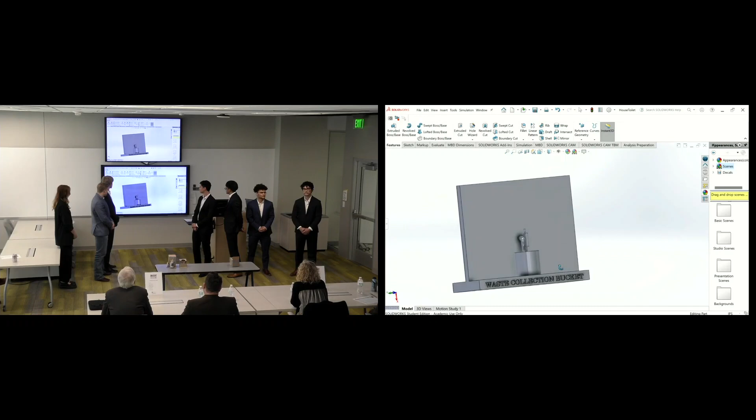Introducing Resoil, a sustainable solution to India's toilet crisis, providing sewageless toilets to every household, enhancing well-being, feeding the hungry, cleaning the streets, and empowering 1.4 billion Indians to make a change in their communities.

For themselves, for their neighbors, for their children, the future of India. This is a dignifying solution to a dehumanizing problem. This is the future for a healthier tomorrow. This is Resoil.

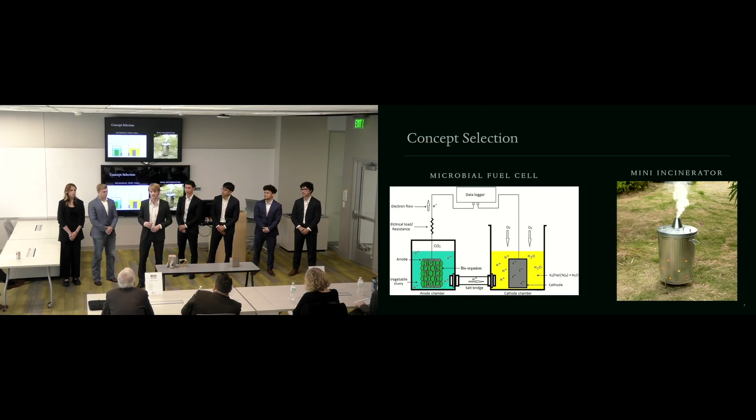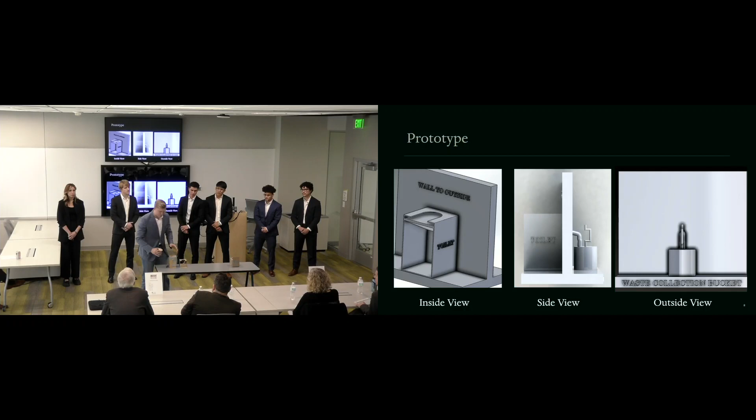This is a business model that combines both a service and a product. This right here is our product and the process we'll be going through. We are providing a system of toiletry access in each household, and coming with that, we are selling this tank right here. This is going to be a 5 to 10 gallon tank that meets the needs of the person, and it comes with a cap that includes a mixer.

Each tank, when replaced, will come with a compound that we make that breaks down the human feces and mixes it together, producing a fertilizer. The process is simple: it is taken out of the house with no contact with the feces itself. It is plugged, then transported to another facility where it will marinate and sit for 140 days while the chemical process takes place. Then it will be placed outside to dry and be turned into fertilizer, bagged and sold to communities. This has been tried in Haiti, but the process wasn't really socially accepted there.

It did work pretty well, but I feel we have improved this process greatly, and it definitely applies to the people of India. And now for more on the fertilization process.

Human waste has valuable nutrients, and by composting it we are able to turn those nutrients into a usable fertilizer. However, to make this fertilizer more saturated with nutrients, we are adding a biosubstrate made from readily available materials like food scraps and grass clippings, and we're going to include that in our buckets.

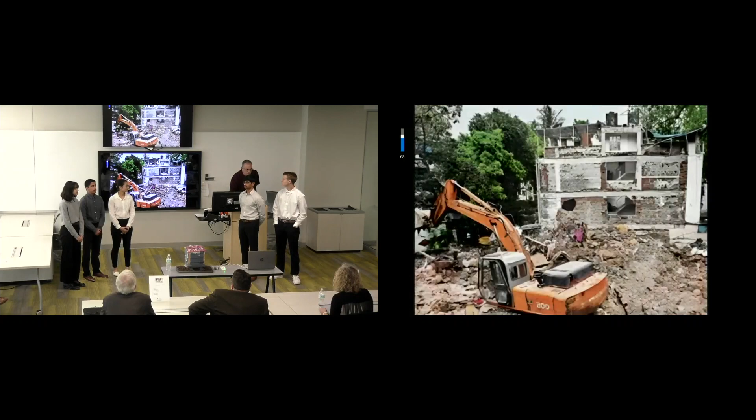This is Alka Palanda and her son Naresh. On June 25th, 2023, their home in Mumbai, India, collapsed from a monsoon. After an overnight rescue operation, it was revealed that both them and their dog were killed. This situation is not uncommon in Indian slum communities. Now, dozens of people have died in flooding as torrential rains sweep across India. There are so many poorly maintained structures and makeshift settlements, too risky to be inhabited, but people continue to live there.

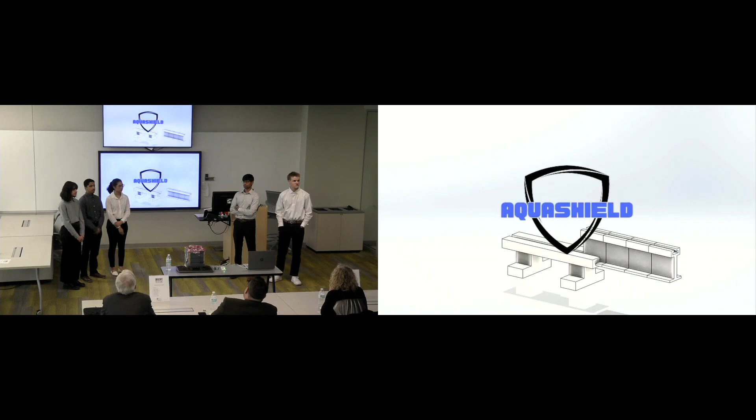So what can we do? Introducing our product AquaShield, revolutionizing housing conditions for slum communities so we can save people like Alka and Naresh and make their houses finally feel like homes.

What we wanted to do with our product is support these homes and ensure that they have the strength to withstand 5 centimeters of rainfall per day for up to at least 10 days. We want to make sure there is efficient installation, so the product should be able to be installed in under 24 hours. Taking into consideration our target customers, we want to make sure it is affordable, so less than $800 for selling.

In terms of ease of operation, considering that these communities are tightly packed and we can't have high construction in this space, it should be installable and operable by up to 5 people maximum. And in terms of the environment of these communities, we want to make sure our product is sustainable, so we should incorporate recycling and reusing waste when manufacturing our product.

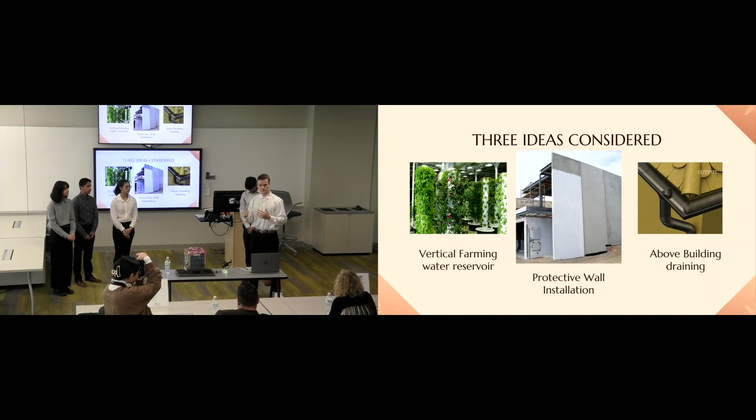What if we could do all 3? Introducing AquaShield. AquaShield is a revolutionary method to revitalize these Indian communities. It is a modular housing solution that uses interlocking panels of recyclable plastic waste, forming a structure that also supports these Indian slums.

The heavy rainwater that accumulates on the roof is channeled down onto the sink at the top, where the water is channeled down into two different routes. It could either flow through the gutter system straight to the local drainage, or it could be channeled down through 3 vertical farms. After being filtered through the 3 vertical farms, the water flows into the storage container.

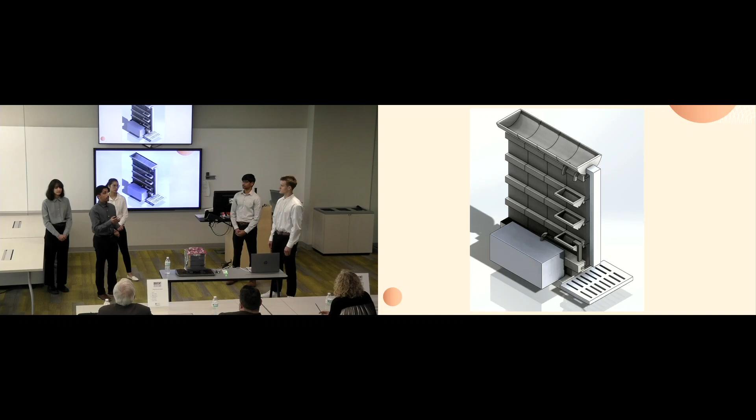There is a sensor in the container that tells the family about the contamination levels in the water. This entire structure is supported at the base through a concrete foundation to provide structural support, and this solution redirects the heavy rain that could have accumulated at the bottom and caused erosion into a sustainable method. Let me give a little product demonstration on how this works with the vertical farm situation.

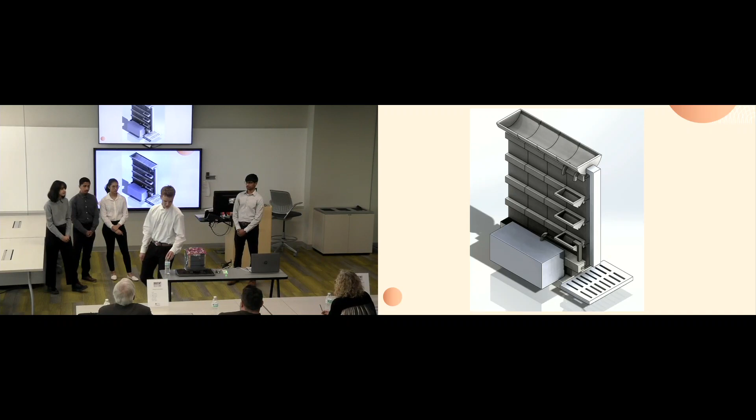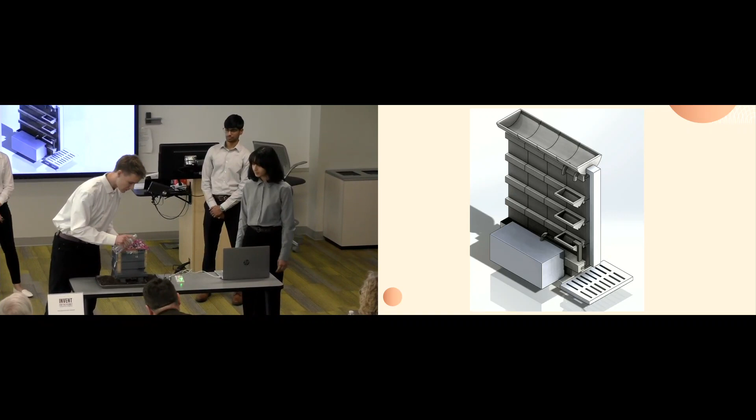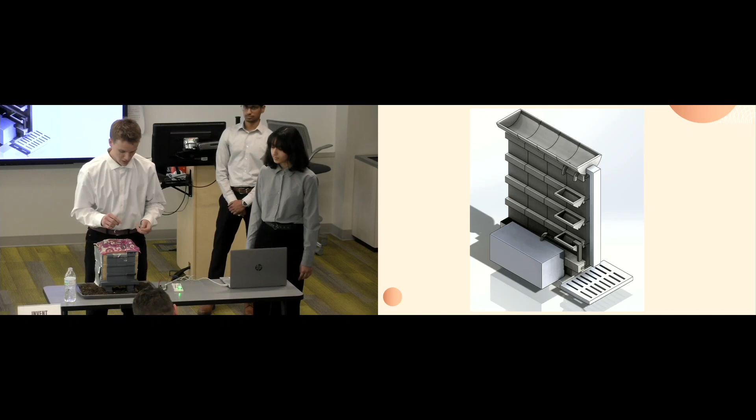So when rain comes down and hits the roof of the wall, it's going to slide off, and right here, when it enters our chamber, there would be walls that contain it and send it through a gutter going to local water storage. There are 2 holes right here, I know y'all can't see them, but they drop down to the vertical farm storage.

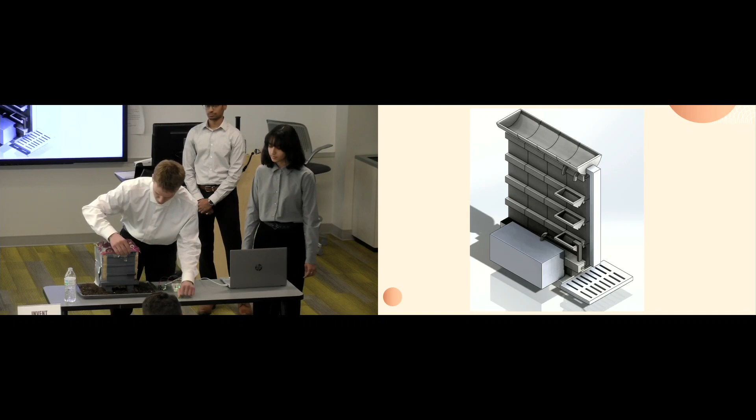It goes through multiple vertical farm sections, filters out the water with soil and charcoal, and then it lands in a storage container that the family would have.

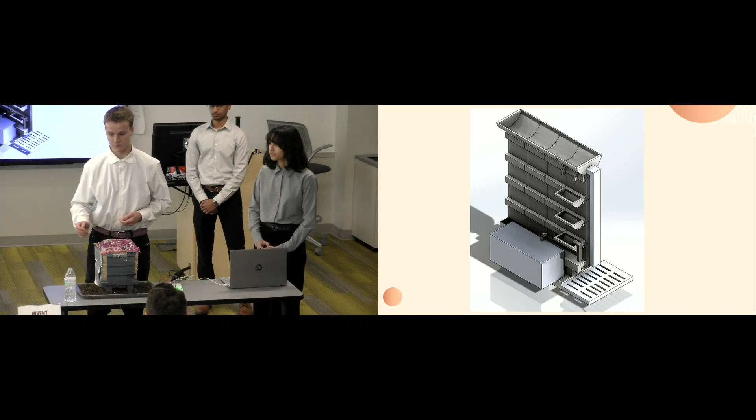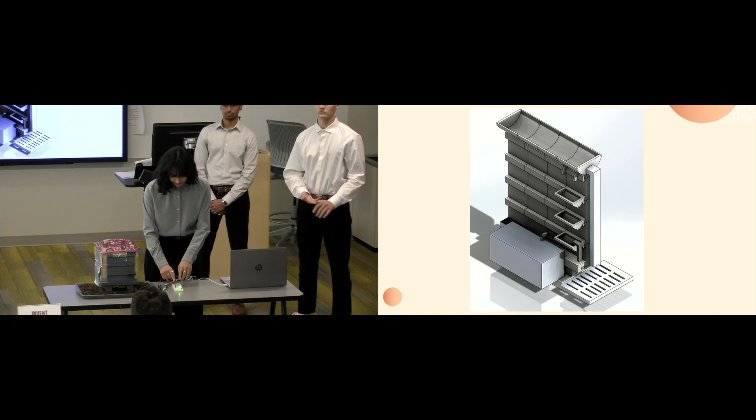So when it comes to that storage container, especially through the vertical farming, we want to notify the residents in case the water is contaminated. There would be a sensor, and if that sensor gets covered, this light turns red, and that would notify the family to ensure health and safety.

Our sustainable solution utilizes high-density polyethylene materials, and also uses reinforced concrete, PVC pipes, and basic electronic components. As you can see, our design was designed with cost in mind and provides very cheap solutions for our customers.

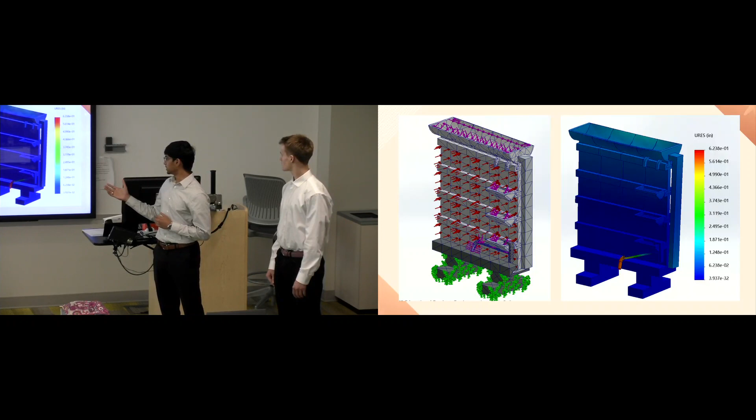And we performed many FEA simulations with high wind loading and water pressure. From this, we can see that the maximum stress and displacement of our structure is within acceptable limits.

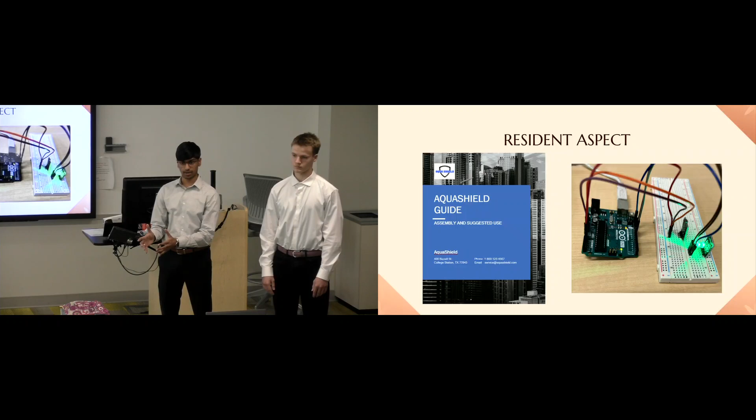And so we are customer oriented here at AquaShield. We provide documentation with assembly instructions, suggested use, and also keep in mind the sensor outputs. We would have that pH sensor or any type of water contamination sensor, which would flash in a simple, easy red or green manner to show if it's good to use or not, and how it had been treated accordingly.

So the future of this - right now it just looks like a wall. What we want to eventually do with it is, because of our interlocking panels and simplistic design, add all 4 walls as well as a roof. So it would be a completely new home renovating system, one wall at a time. We'd like to add a variety of panels, so you'd have a door panel, a window panel, to make it truly a home.

Imagine half of this room was living in unsanitary and unsafe living conditions. Join AquaShield and allow us to help these communities just as you would help the person sitting next to you. Thank you.

Judges, what questions do you have for AquaShield?

So you have the $800 target. How does that compare to what they would normally be spending? It sounded like a lot of it was salvaged materials, so how does that compare? And is that for one wall, or for the full home, and how does that compare to their current housing cost?

We started with that $800 budget to keep it simple, and with a 4 foot by 8 foot wall, that would come out to a total of $541. Currently there was one grant sent out by the Indian government to give $1,200 of restoration per home for slum communities. Considering this is $541, that falls into what was previously proven from grants, so that's why we think this would be a good solution.

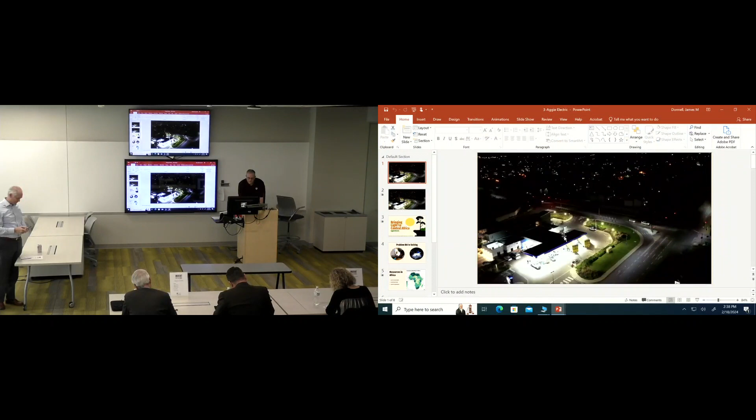Now it's time for your local utility, Aggie Electric. City. Judges, just a minute. It's going to be a cold, dark night. Whoa. I just said wait until the judges get.

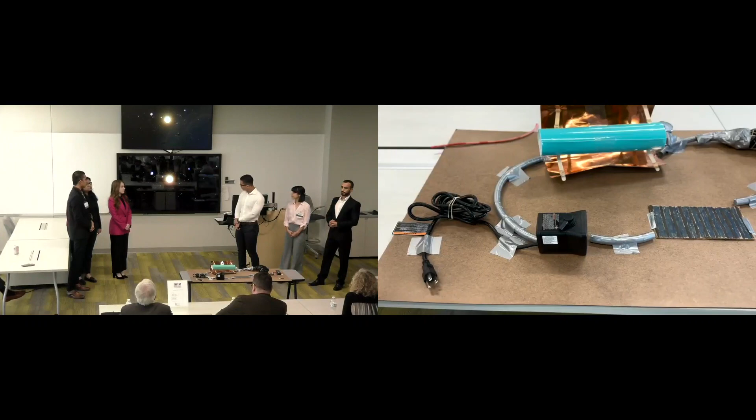Meet SunSteam, a leap into the future. It's simple: we use mirrors to concentrate sunlight, boiling water to create steam. This steam then spins magnets around a coil, converting sunlight into electricity. And the best part? We collect this steam, turn it back into water, and start all over again. Endless energy from an endless cycle. With SunSteam, the end of daylight no longer means the end of opportunities. Education, safety, warmth, now within reach for every home, every heart, powered by the sun long into the night. With SunSteam, we harness the power of the sun to bring light and energy where darkness has lingered for too long. It's not just about providing electricity, it's about igniting hope, empowering dreams, and enabling progress in every home and heart we touch.

This is just the beginning. With SunSteam, we're not just imagining a brighter tomorrow, we're making it. Join us and let's bring light to every corner of the world.

Hundreds of millions of people in Africa need reliable and affordable electricity to light their homes, power education, and fuel development. Picture this.

Picture this: when the sun goes down in Africa, many homes stay dark. Why is this? It's because they don't have electricity. They need electricity to power their homes for any electrical process that they need. Imagine this: you can't charge your phone, you can't keep your food in your refrigerator, you wouldn't be able to turn on your bathroom light at night. 600 million people have to go through this in Africa.

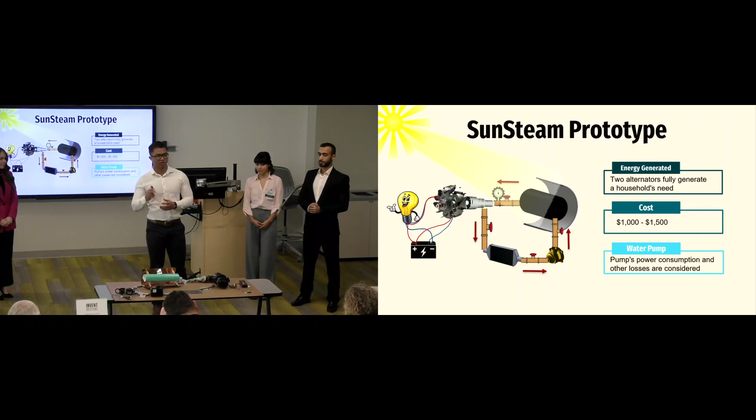Our solution is all about using what you have, right? The sun. So join us - it's all about using the sun, right? So join us to make a better life for everyone. Thank you.

I'd like to push back a little bit on the perceived complexity of this versus solar. Could you dive in a little bit deeper into why this is a less expensive solution compared to just a solar panel and a battery?

Usually in Africa, there are two different types of programs used for solar panels. Either a very small kit, $30 or so, with one lamp, which is effective for one light in one room but doesn't generate enough energy for the whole house. The other is government funding, where they put in solar panels and citizens pay as they go. But studies show that over time the costs really add up, and people end up consuming less energy than they are paying for.

This would help lower the cost. It would be an amount of money paid up front, but it would be good for years, so they pay these low costs now and have it over time. It wouldn't be an amount of energy that's absurd for them that they couldn't use.

So if I might add one more point, the answer is simple. We need 5,000 kilowatt hours per year for the household, so we did the math on how much energy one square meter of solar panel can generate. By calculating the area needed and the cost of those panels, the cost came out to be about $5,000 to $8,000. Using just a simple car alternator, maybe $80 or $100, with a pneumatic motor and a water pump, fabricating a simple tank and mirror, the cost was way less than a solar panel.

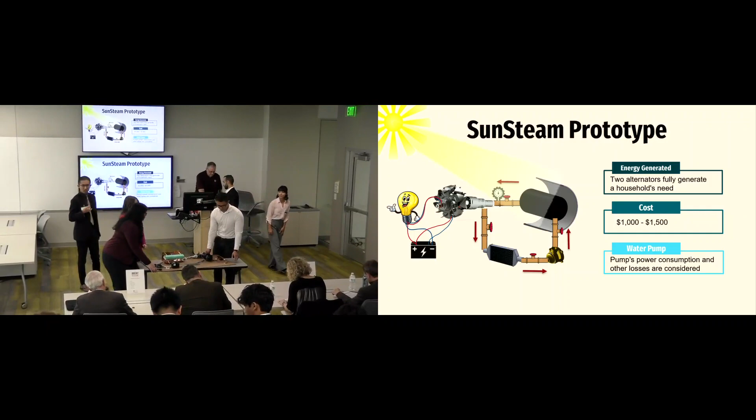Guys, so I'll tell you something. So you guys just get settled in. Let's let the judges wrap up their judging of the last team.

What is the native language of Papua New Guinea? Like anybody's gonna know, right?

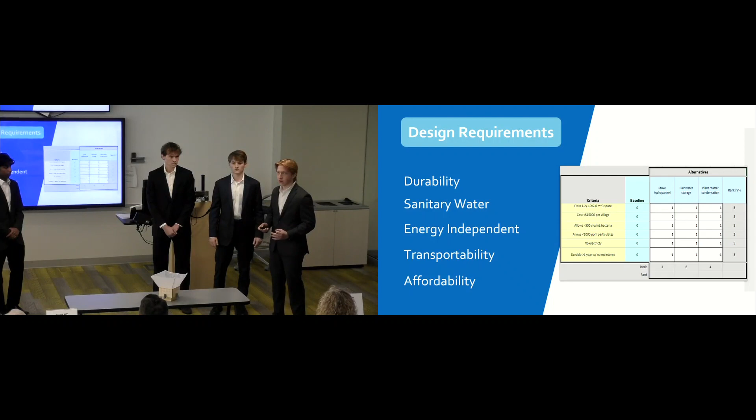These design requirements led us to three initial solutions that we brainstormed. Our first solution was a stove-powered hydro panel. At a high level, it takes in energy and heat from the stove and creates a high pressure area and a low pressure area on the other side.

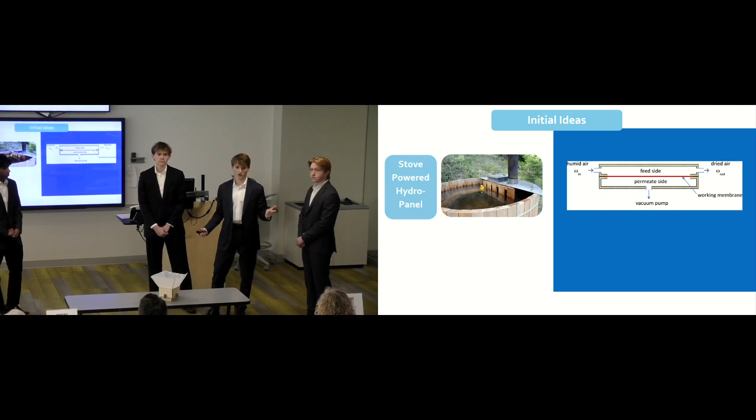It forces the humid air of Papua New Guinea through a semi-permeable membrane to draw the water out of the air. The problem with this is cost - that costs a lot. The second problem is health issues: if we don't manage the CO and CO2 coming out of the stove, we can cause health problems for the Papuans. The second idea was to plant a large-scale solar still.

Basically, we capture and collect water from plant matter. At a very high level, it's essentially a bag for a tree. This helps with costs, which are very low, but the two main problems are that it doesn't create enough water, and it requires a lot of maintenance.

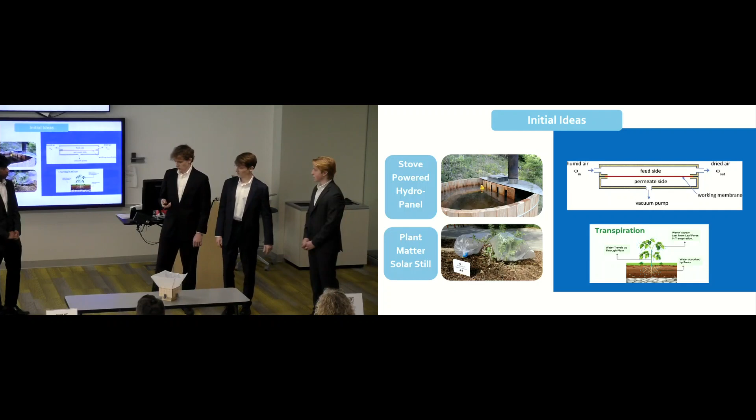Our third solution, which did meet all of our proposed design criteria, is an improved rainwater collection, storage, and filtration device. Our system is made out of modular panels that allow customization for whatever size storage is required for the village. It also includes a large canopy, increasing the aerial surface area, allowing it to gather rainwater for the dry season.

In between the canopy and panels, there's a fine mesh that serves two purposes: removing particulates from the storage container before it can enter, and reducing evaporation during the dry season. To access this water, it's moved through the filter, removing any bacteria before consumption. These filters can also remove particulates and bacteria from any other sources they may need supplemental water from.

Every component of our design is made out of a high durability polymer capable of lasting in the Papua New Guinea environment for many years. The lifespan of a filter is approximately 1 year, but this is heavily dependent on the size of the village. The entire component can be built using only basic hand tools and repaired with these same hand tools, which will be given to the community. This is critical, as our target demographic is deep in the interior of Papua New Guinea with little access to outside resources or assistance.

We also wanted to ensure that our filter was producing sanitary water, which we defined using two measurements: bacterial contamination level and dissolved particulate matter. If you look at our filter, you can see it has two stages, one for removing particulates and one for ensuring an antimicrobial water supply.

Our filter has two inlets: one for rainwater passing through from the large collection barrel you see here, and the other for small pots of water dumped in from a river. The dirty water from a river would go through both filters, whereas rainwater, which is essentially distilled, would only have to go through the antimicrobial filter. Also, our device is gravity fed due to the nature of these filters and can be used in remote locations, ensuring it's energy independent.

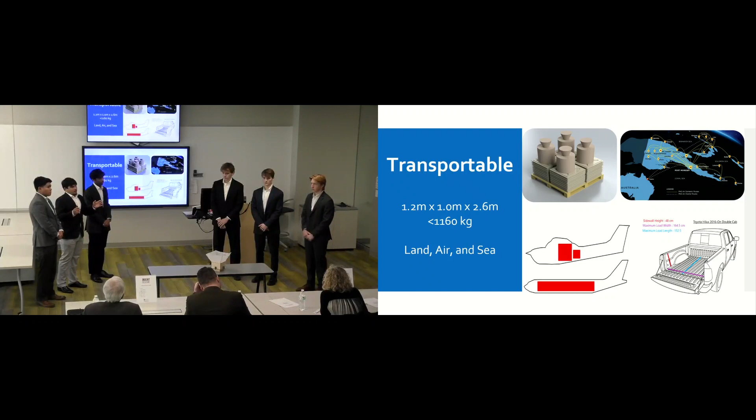We wanted to make it transportable, so we bring it from Australia to the inland, and then put it on pickup trucks and send it out to these rural villages, because Papua New Guinea has over 381 airports.

Next, we wanted to make it affordable. The next best option is wells, which cost over $15,000 per village, and we wanted to make it less than $15,000. We use local materials in our filters, such as zeolites and other nanoparticles.

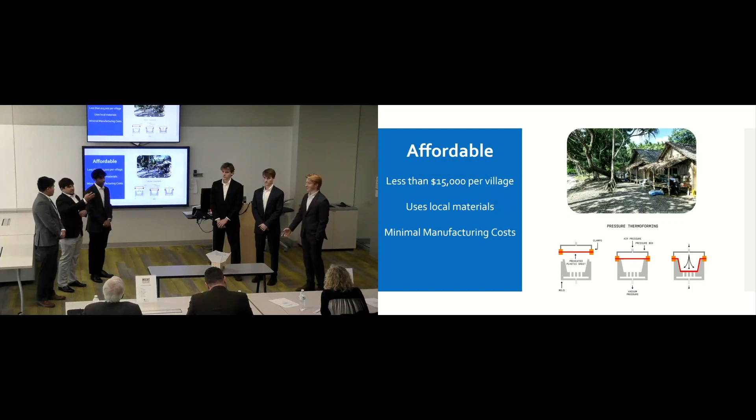We also have a minimum manufacturing cost system that is pressure thermoforming, in order to produce these at a mass scale. Thank you.

Questions for the project? How many gallons does this thing hold?

It's going to be heavily dependent on the village size. This is our standard configuration, where each panel is about half a meter tall, so this would be 7,000 liters. This is meant for a village of about 150 people. And how long will that sustain them?

This would be seen more as an emergency supply during the dry season. It would not last the entire dry season, but you could use the other intake on the filter to supplement this with other water. If you were unable to, due to an injury or an emergency, you would still have 7,000 liters to access.

So the problem is, they have access to water, they just don't have access to clean water, and they're making long walks. If you insert water into the funnel on top of each filter and pour it in, it's gravity fed. It also captures rainwater during the rainy season to help reduce how often people need to make the trip for water. So this is a water filtration and capture system.

Yes, and storage is also very important, as they have no real sustainable storage systems. This also allows you to use two different vessels for storage and gathering water, because if you stored water in the same vessel you gathered it in from a dirty creek, you'd still contaminate it with bacteria. So here, you have a gathering vessel, you run it through your filter, and with a separate, more sanitary storage vessel, you're drastically reducing the risk of bacterial infections.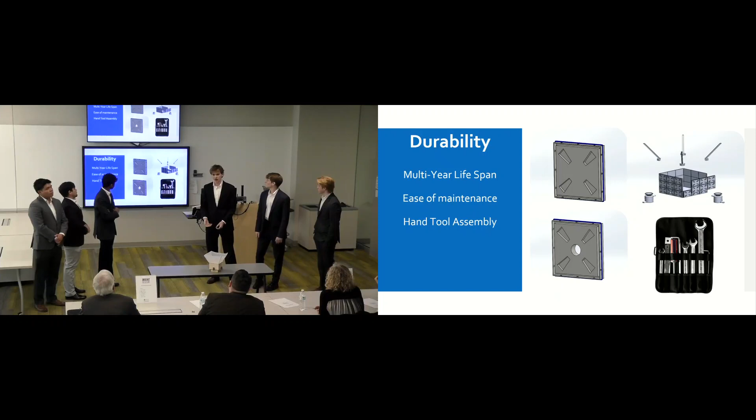It is going to be a little time-consuming to assemble this, but we're hoping this is a community effort involving the whole village, assembled using only basic hand tools that we would provide, bolts and locking washers. We also include a maintenance kit with spray foam and ways to mitigate leaks if that should occur, and instruction manuals to help ensure assembly is done correctly.

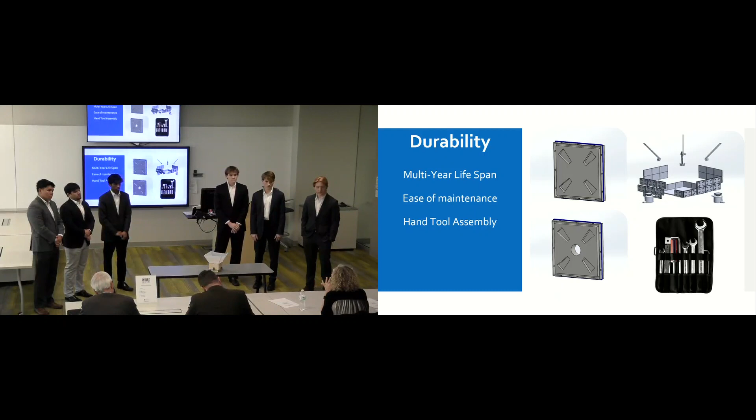The bacteria they're talking about is to be addressed with a filter that's only replaced once a year?

We'd love to talk about the unique design of our filter. There are two stages: the dirtiest water first goes through a particulate filter, designed with four layers. We wanted to ensure it wouldn't change the taste of the water, and that all the filter materials were biodegradable, because we don't want to bring excessive plastics and other materials to contaminate their environment.

Our filtration works by passing through coarse gravel, fine gravel, sand, and diatomaceous earth to ensure thorough removal of particulates. We believe our strongest innovation with regards to the filter happens in the antimicrobial layer, which is essentially a modified cellulose matrix impregnated with zeolites.

These zeolites have copper and zinc nanoparticles bonded to them. This ensures that bacteria and protozoa are killed as they pass through the membrane while still being a fully naturally derived material. Cellulose matrices essentially just mean modified cotton balls.

Cotton that is chemically treated and then having zeolites grown in situ in them and then having these nanoparticles bond to the surface. It appears just like a natural material that these people would feel comfortable with and be able to understand. Unlike chlorine and iodine-based disinfection tablets, it wouldn't impart an off or chemical taste to the water that would result in the population not wanting to adopt such a technology.

Based on how this is designed, we are removing most of the cloggable materials early in the filter. Because we're not using chemicals like chlorine that get used up generating reactive oxygen species in the bacterial destruction process, but rather using these nanoparticles that don't get used up but just stay in place and disrupt the cell walls, we can ensure our filter lasts for a very long time because those materials are not being consumed and it's not being clogged either.

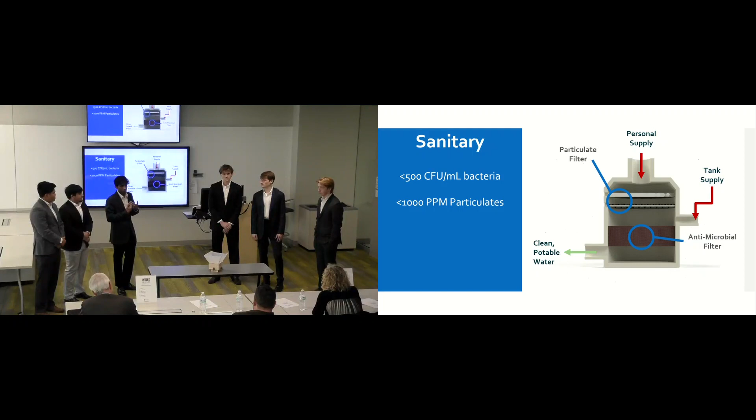Okay, that answer chewed up our time, so we are finished. Thank you.

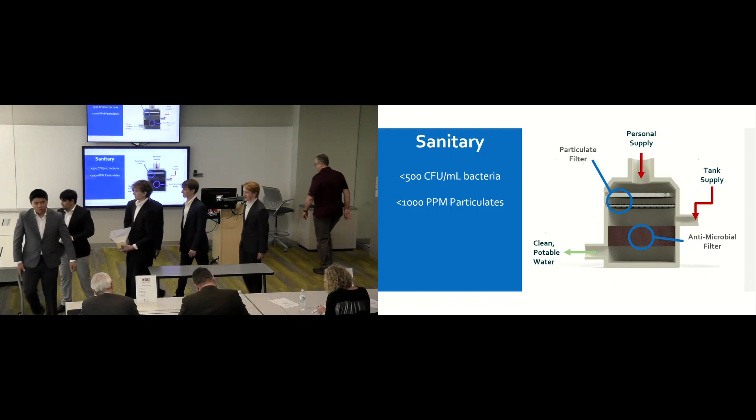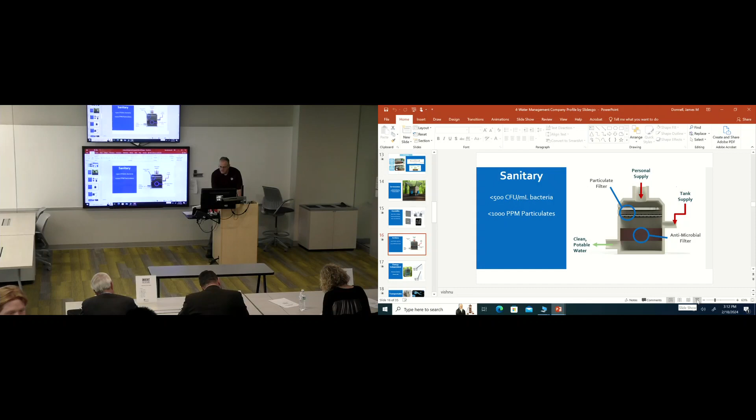Clicker, you guys take the clicker? Yeah, ready? You guys got the clicker. You took the clicker with you. It's a competitive advantage. Don't let the other teams have a clicker.

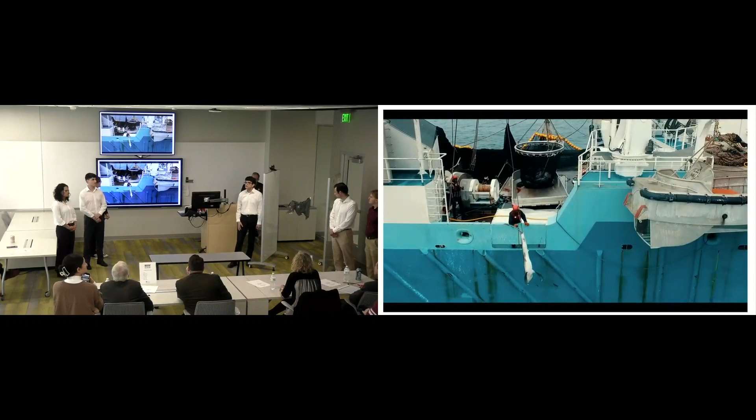The demand for food is growing at rates it has never done before. In order to keep up, fishermen are using unsustainable practices that claim the lives of millions of animals and destroy their habitat. The most damaging method is bottom trawling, used to catch shrimp. They drag giant nets across the bottom of the ocean floor, destroying any coral in their way.

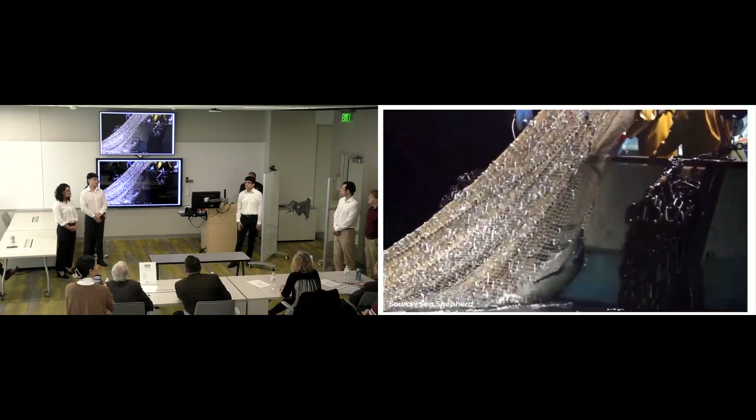Another problem is that it catches way more than just shrimp. Bycatch is the catching of unwanted animals during commercial fishing. Mammals like dolphins and turtles get trapped in nets and can't escape until it's too late. Fishermen often cut off the nets because they get stuck on the ocean floor.

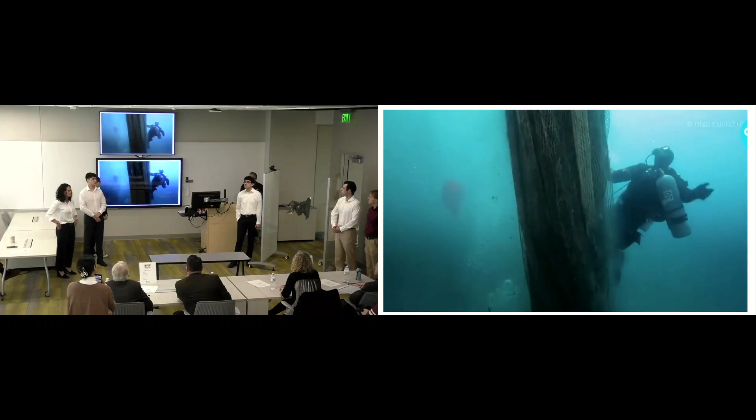Fish nets are the most lethal form of trash floating in the ocean. If the nets do break down to very small parts, fish consume it, introducing microplastics into your food. The environmental toll the fishing industry is taking on the ocean is unsustainable.

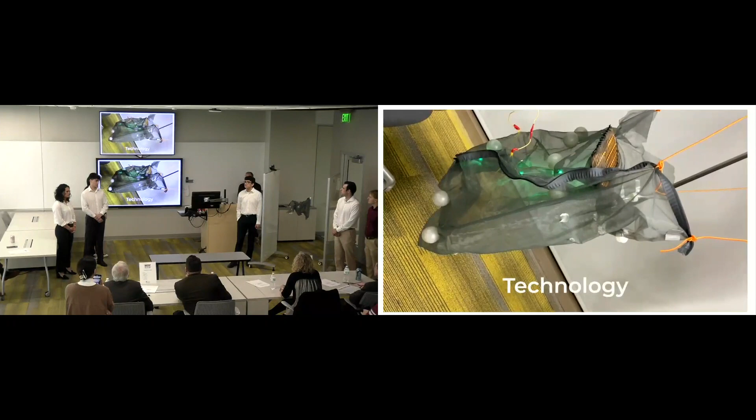But it doesn't have to be this way. Through adaptation of traditional bottom trawling nets and innovative technology, it is possible to maintain the current supply of seafood while minimizing the damage to the ocean. Replacing today's practices with sustainable ones ensures the fishing industry can keep thriving for centuries to come. Join us to forge a path to maintain the ocean's beauty.

We want to solve this problem by minimizing bycatch and minimizing marine destruction during shrimp bottom trawling in the Gulf of Mexico.

Because this is an environmental first product, any successful design needed to reduce bycatch by at least 50%. The shrimping industry in America has been around for over a century using the same methods. If we continue, there will not be a shrimping industry in the next 100 years.

We'd also like to reduce seabed contact by at least 50%. And because, of course, without commercial fishing partners, we wouldn't be able to change our practices, we are respectful of their time, of their 18-hour workdays.

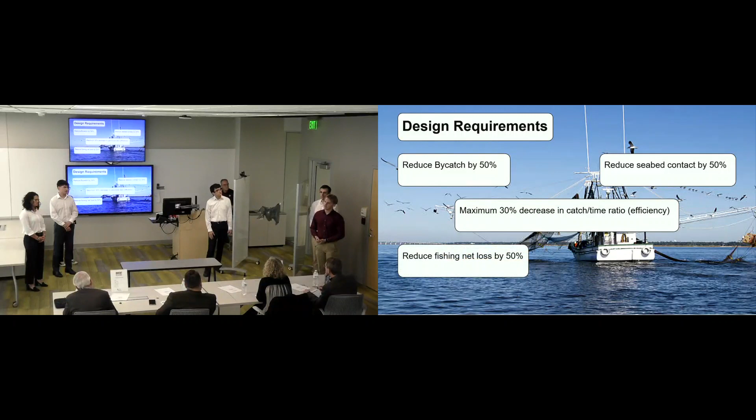We'd like to decrease their efficiency as little as possible. We'd like to reduce the damage and loss of their equipment by 50%, which also contributes to ghost nets.

And of course we understand many of these are medium, small, and family-owned businesses. We'd like to burden them as little as possible with costs. You may see 50% as a recurring number here. This was just a base estimate. We do hope to exceed these numbers significantly, but we wanted to have a solid commitment.

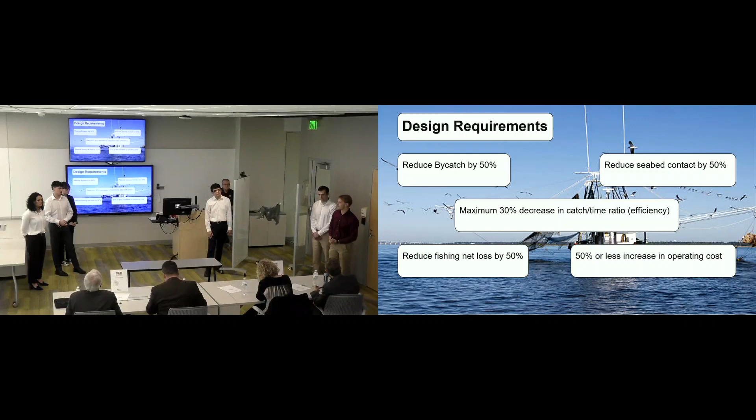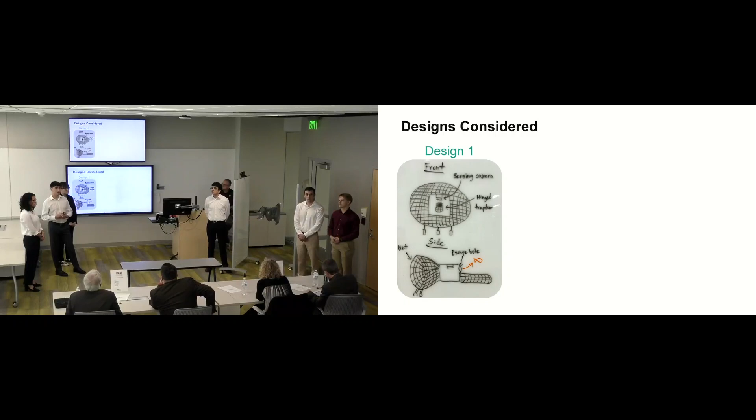So we came up with three net-based designs to address these design requirements. The first design features a sensing camera that detects species other than shrimp entering the net. When it detects a species other than shrimp, it allows it to escape through the escape hole. The second design features a filter screen that filters aquatic species larger than shrimp. However, if a baby fish the size of a shrimp slips through the filter, there are escape holes provided at the top so the fish can find its way out. The third design features a centrifuge that uses centrifugal force to sort the smaller fish from the larger fish.

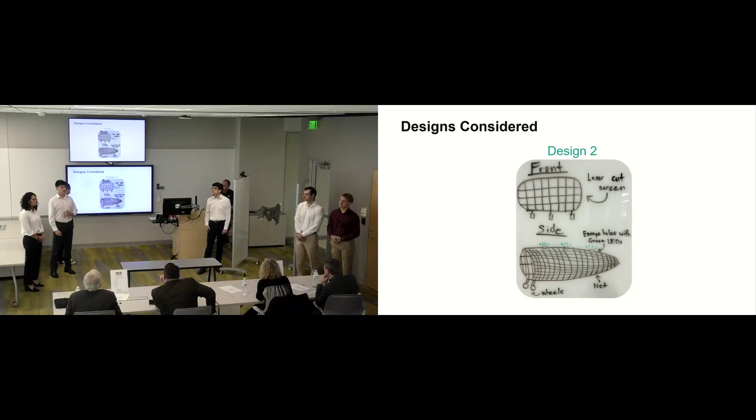Ultimately, we decided that design 2 is the best because it addresses the design requirements the best while minimizing the cost of production. We also felt it was the most feasible to design while being the most efficient in reducing the amount of bycatch.

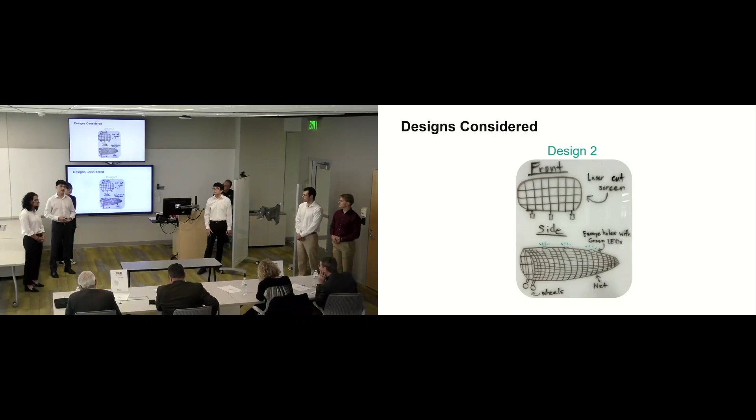So during our research for this design, we found there's a number of existing solutions that attempt to mitigate the negative effects of this fishing practice. Our innovation is integrating those different solutions into one cohesive unit that attacks the problems from a number of different angles.

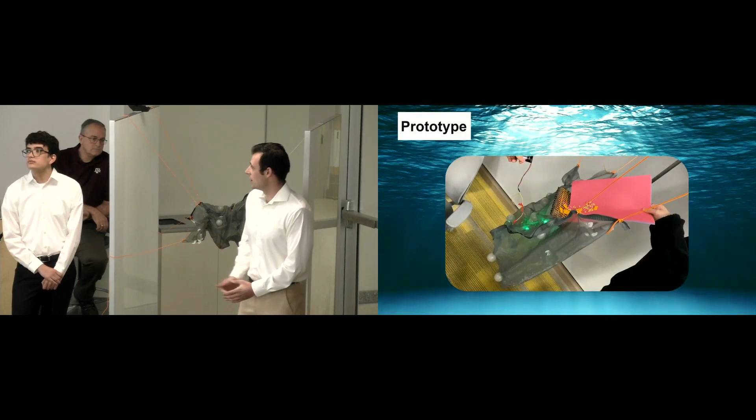So here's our prototype. You can see there's a laser cut grate at the front of the prototype, which will prevent fish that are not the target species from entering the net, while allowing shrimp, the target species, to enter without resistance. We have a video demonstrating this, where the small particles represent shrimp, whereas the goldfish are the non-target species.

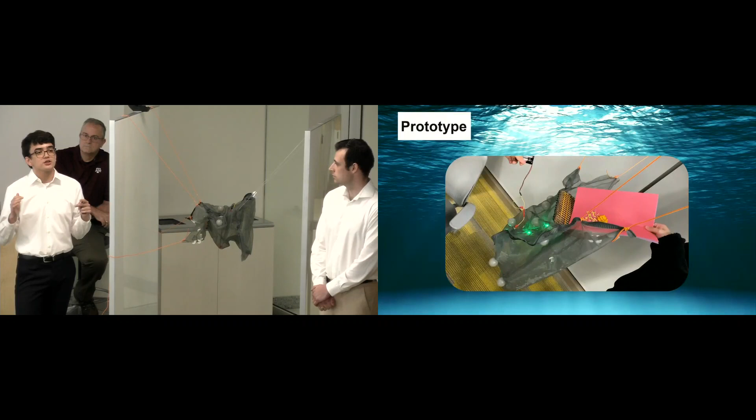So now we have this filtration system for size initially, but what happens if these smaller or younger fish actually get through that filtration system? That's why we have these green LED lights, towards the top of the net with escape holes, to allow the fish attracted to this green light to swim towards the top and swim out. You might be wondering, can't the shrimp get out too? Well, shrimp naturally stay towards their habitat, towards the seabed, so we don't anticipate any issues of them swimming out towards the escape holes.

Also, with the green LED lights, we intend to put a power source on one of these flotation devices, which you'll hear more about in a second, with waterproof wiring and casing going to the LEDs. The LEDs actually heat up and prevent algae and barnacle buildup, so they don't need to be replaced as often, only about every 5 or 6 years.

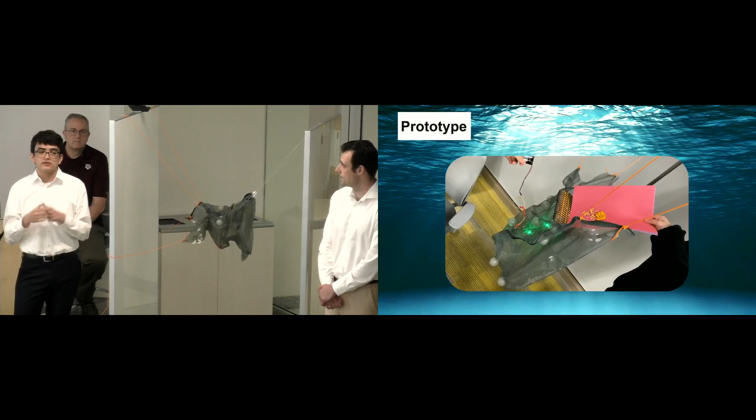We also wanted to include a drag reduction system in our update of this 100-year-old method. The current method drags a net surface area of 2,000 feet across the ocean floor all day, every day. How bad is this? This one particular type of fishing contributes the same amount of CO2 emissions from stirring up mud as all aviation globally.

So at the front, we have solid rubber tires that reduce the amount of friction, no dragging but rolling. They're heavy enough to ensure contact with the seafloor, which is where most of the shrimp catch is going to be, so it doesn't interfere with that aspect. We also have significantly more flotation devices at the top to lift approximately 90% of the surface net off of the seafloor and reduce the amount of drag.

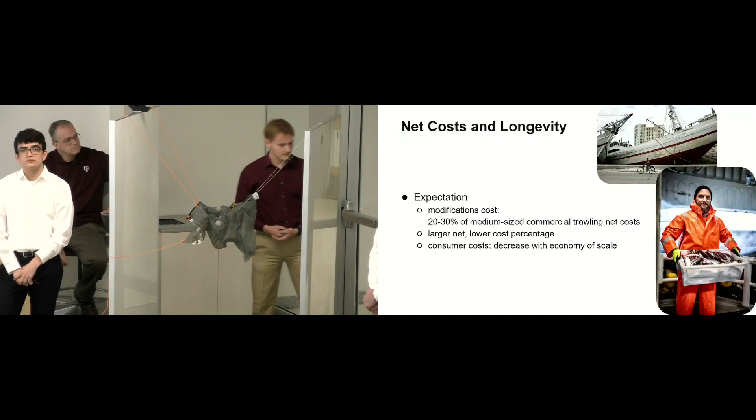We estimate the cost based on current manufacturing practices and material costs. In our expectation, the modification cost would be 20 to 30% of a medium-sized commercial trawling net cost, and the cost percentage will go down the larger the net because of lower fuel cost. Also, consumer costs will be decreased with economy of scale.

Okay, so obviously our net's going to be a little more expensive than your typical run-of-the-mill standard net. Some ways we intend to be more commercially viable is through public perception. There was a World Finance study that showed approximately 30% of consumers are less likely to buy a product from a company that engages in poor environmental practices. We all remember the BP incident and how they still have that kind of image and reputation in dealing with that.

About 70% of consumers are more likely to purchase seafood in the store if it has some sort of sustainable labeling on it. Our net actually meets the requirements of the Marine Stewardship Council, so any seafood sold that's caught with our net will have this labeling. We expect it to increase sales for them.

Another recent trend is regulations in fishing zones. Once commercial fishing reaches a certain bycatch rate, they're forced to close that zone early and aren't allowed more time to fish there. With our net decreasing their bycatch, they're allowed to fish longer, get what they want, and ultimately make more sales by not closing those zones early.

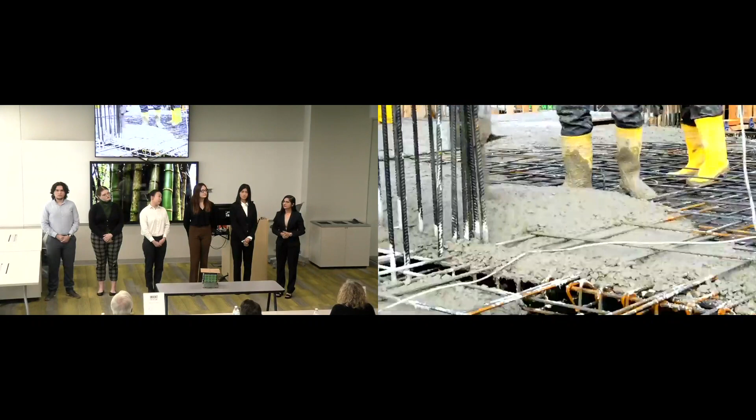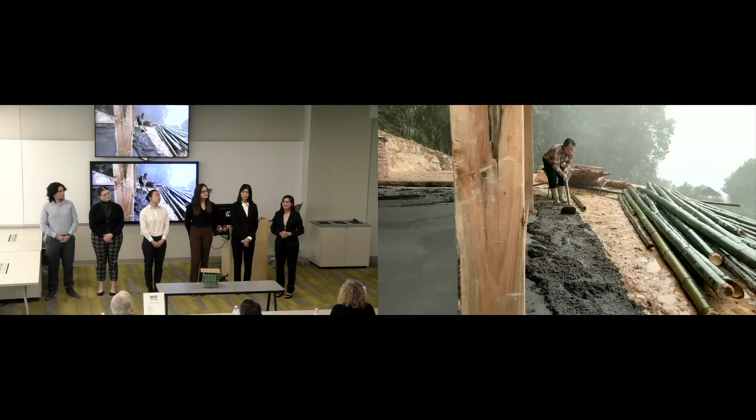Vanguard infuses concrete with the natural strength of bamboo, providing people with a cheap, eco-friendly solution that allows them to improve their living conditions without sacrificing their community. From repairing cracks to building entire houses, Vanguard is invented to address the needs of these communities. We are not repairing houses, we are repairing homes. We at Vanguard believe that the preservation of culture and safety of those closest to us take precedence over all. Vanguard: strength in nature, durability in design.

Nuclear engineer, and these are my teammates. Hello, my name is Christine Park, and I'm a junior electrical engineer. Hi, my name is Lauren Christians, and I'm a senior material science and engineering major. Hi, I'm Lisa, and I'm a mechanical engineer. Hi, my name is Emily Baker, and I am a senior in applied mathematics with an emphasis in computational science. Hi, my name is Alejandro Castro, I'm a senior in industrial distribution.

Okay guys, I want you to imagine for a minute this situation. Imagine the walls in your home have holes in them, are broken. Imagine your family was constantly being infected with diseases due to the pollution in the area. Not only that, imagine your house being flooded because of the monsoon season. In addition, there are also earthquakes that constantly happen within the area, which have caused 20,000 preventable deaths within your own community. Approximately 94 million people live in this area, going through those same circumstances, those same issues, and facing those same problems every single day.

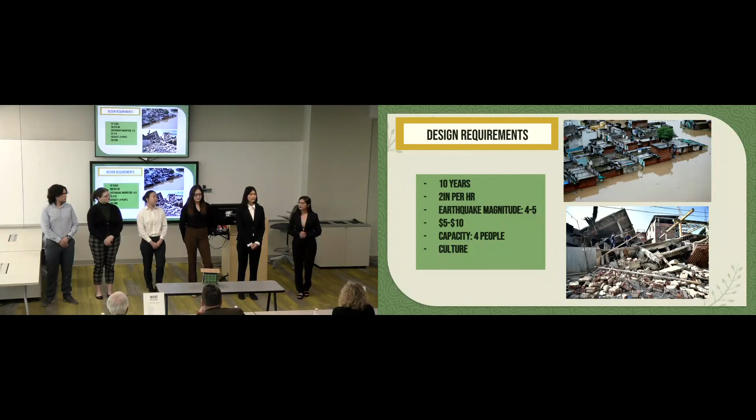In summary, there needs to be a cost-effective, durable material for eco-friendly housing repair. To start, we had to consider 6 design requirements. For our design, we wanted it to be durable for roughly 10 years, able to sustain 2 inches of rain per hour, hold against 4 to 5 magnitude earthquakes, maintain a budget of $5 to $10, be a feasible option for a household of around 4 people, and be respectful to the culture of the people we're trying to help.

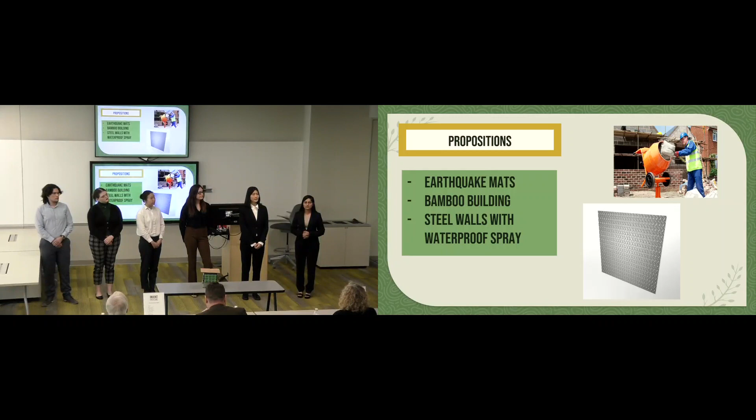For our early propositions, we considered earthquake mats, bamboo building, as well as steel walls with waterproof spray. After more research, we considered the economic feasibility of these options, wondering how we could implement it with tools that are readily available, and how we could be more considerate of their position by being more mindful of how they want to implement it in their own community.

BAMGuard is a revolutionary concrete composite that contains bamboo, which is both cheap and eco-friendly. It contains about 1.5% bamboo fibers, 32% bamboo powder, and the rest is a normal concrete mix. This allows us to strengthen regular concrete, and it would be much cheaper, since about a third of it is bamboo, which is basically free within India.

This concrete mix would be able to aid in damage against monsoons and earthquakes, which are very prevalent in India and cause tremendous damage.

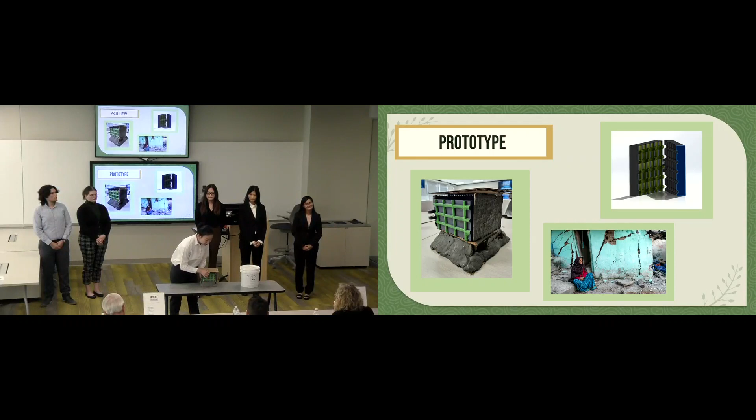And this is our prototype. You can see this is the inside — if you were to cut the wall in half, this is how the inside would look. The bamboo sticks are embedded into our concrete.

In conditions where there are very severe weather conditions, houses can be destroyed. In such a case, we recommend reconstructing a new house based on our prototype.

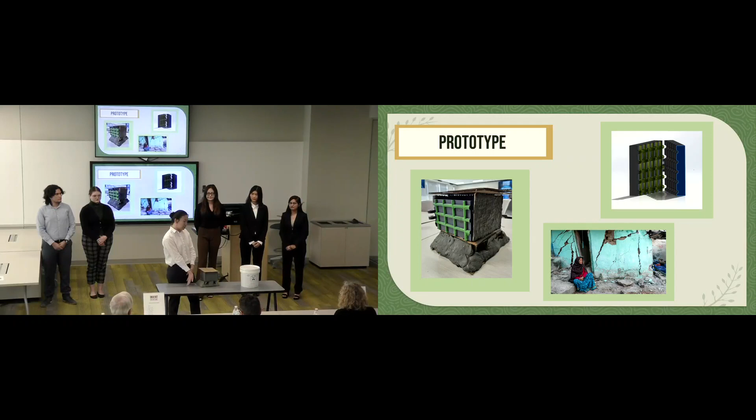Our concrete can also make the base of the house. We can build water tunnels inside the base, so water can flow through them, and the slope of the side of the wall allows water to drain down, so it won't damage the house.

We've calculated an estimated cost for a bag of BAMGuard to be about $6. This is well within the price range for someone living in these slums, who earn about $47 per month.

We're trying to keep the labor local, so manufacturing will be done in India. This way, we're not only able to keep costs down, but we're able to offer employment at fair wages, so we're attacking the housing problem while also helping to bridge the wage gap.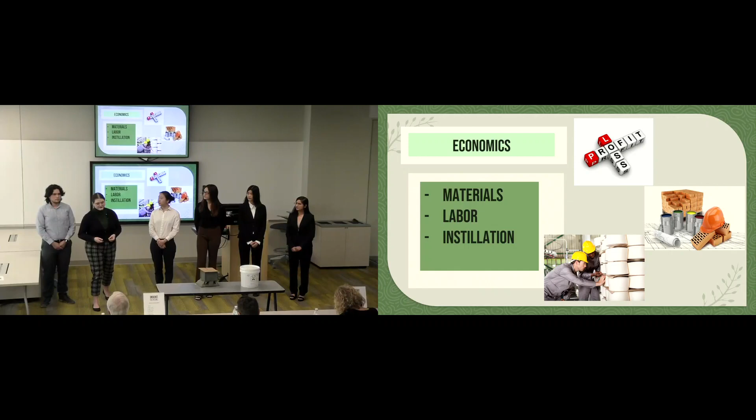Looking at this problem from a Western perspective, we might think it could be solved by just moving all the people from the slums to places with better conditions. But our goal is to preserve the culture and preserve those communities by not destroying their houses, but rebuilding their homes.

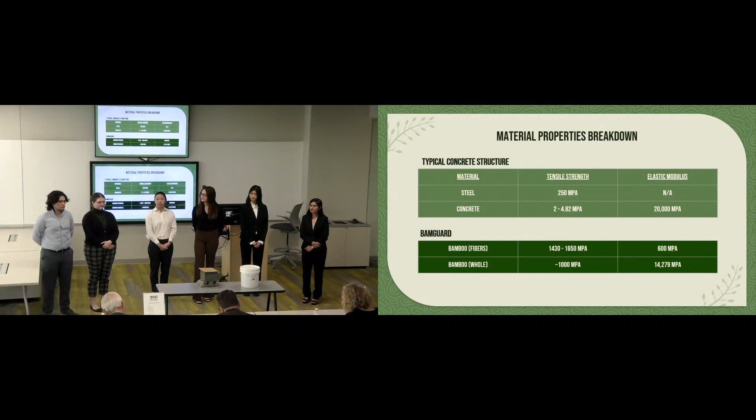Okay, used it right, used it right. Okay, WaterWise, there's a clicker for that. You guys just get settled in right now. Let's let the judges finish scoring the last team.

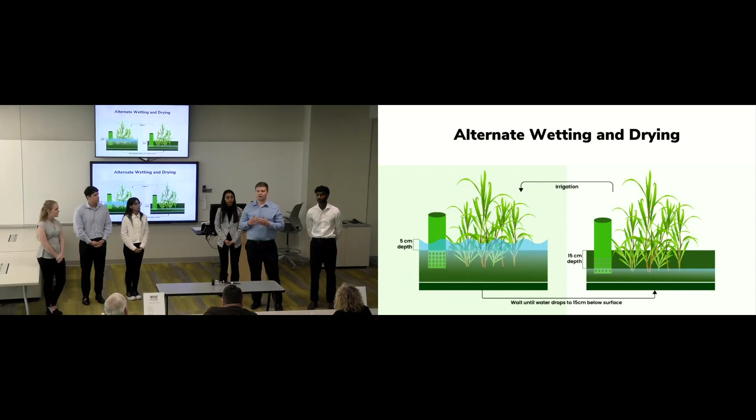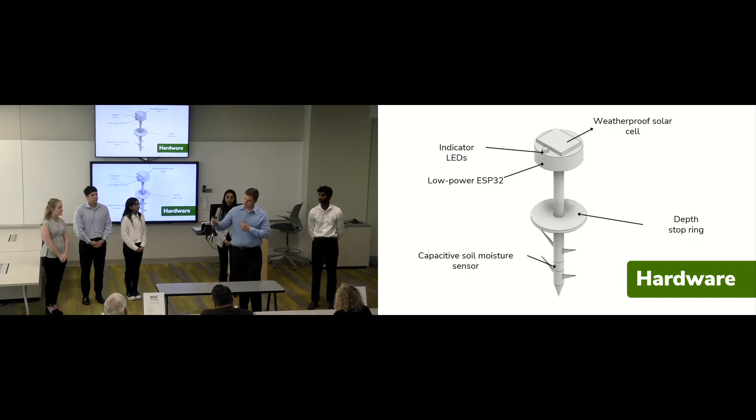So we have developed a device for this purpose: the WaterWise sensor stick. Here's how it works. You simply stick it in the ground, and water up and flood your field up to this point. Once the water has dropped 15 centimeters below the ground, the light turns on. That's it. Adopting alternating wetting and drying is as simple as sticking a stake in the ground.

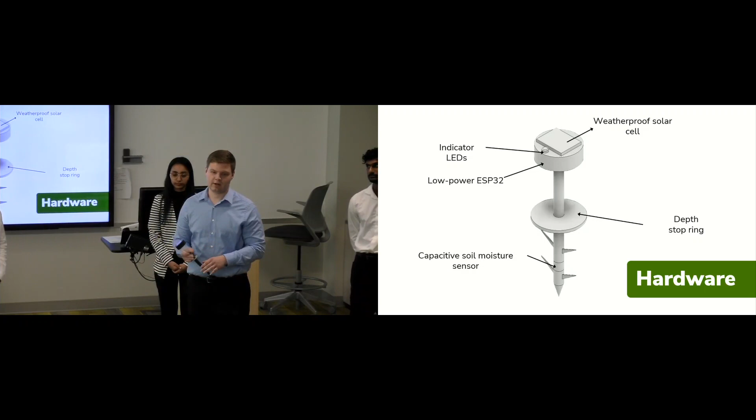Now, the feasibility of this project. The first three things we need to mention are environmental feasibility, timeline feasibility, and economic feasibility. As for environmental, let's be honest, conventional flooding just doesn't work. Farmers continue to waste billions of gallons of water every single year just to make rice. Our method proves that if we can drop it by 40%, we're essentially saving roughly 6,000 to 8,000 gallons per person in India.

As per timeline feasibility, this product can be created by today, the end of the week, the end of the month. The process is as simple as sticking it in the ground and following the techniques. It requires no previous infrastructure or creation of new infrastructure.

And finally, the economic feasibility: the cost per sensor is $20, and it's only required to have one sensor per acre, meaning you can see all the benefits you would typically get in a normal flooding system without seeing any of the negative effects of wasting water or emissions. Farmers also see an increase in annual return, as many farmers who have adopted this system in Vietnam have reported a 10% increase in their annual salary.

So we are proposing both the introduction of the alternate wetting and drying irrigation system in India and our WaterWise sensor stick. The sensor stick exists solely to give peace of mind to the farmer, so that he knows this new system will work and he will know when to re-flood his field.